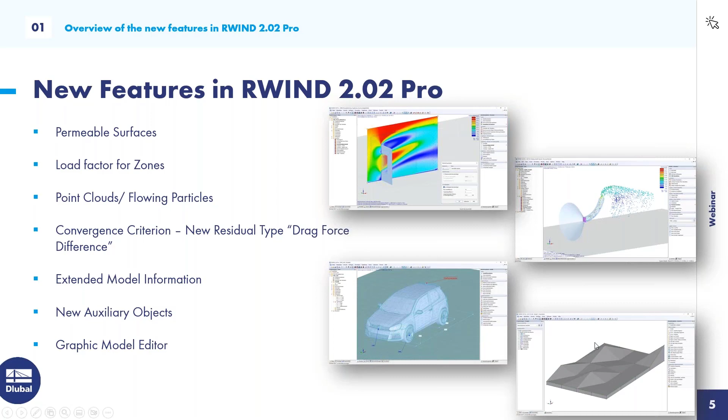Last but not least, the feature I want to show today is the graphic model editor, which will allow you to directly model in RWIND. You do not need CAD software, or you can also use RWIND besides using RFEM 6. This allows you to create models and also to create a terrain with thickness vectors. So whenever you are curious about modeling the terrain and the effect it will have on your model and the wind flow, you can do this directly in RWIND.

Let's go to the first slide, which gathers some more detailed information. As you can see, I have put some links on the top right of the slide. They can be clicked and you will be directly guided to the topics of the online manual.

These newly introduced surfaces are meant to be introduced for zones as a material. You are supposed to enter 3 parameters: the Darcy coefficient, an inertial coefficient, and the porous media length in the flow direction. You can see on the right how these formulas are put together, about the permeability in square meters and the Forchheimer parameter. Of course, you will have some preset data, so there are standard values introduced, but it's up to you to calculate these parameters and enter them for your zone.

It's mainly meant to be a boundary condition, a prescribed pressure drop on a defined surface, front or behind. The main advantage we see in these permeable surfaces is that no fine modeling of your permeable structure is necessary. You can imagine it allows simulation of scaffolding tarpaulins, dust protection curtains, or mesh constructions, which are usually a quite thin structure, leaving you with a 3D solid mesh that needs to be quite fine, at least in these areas.

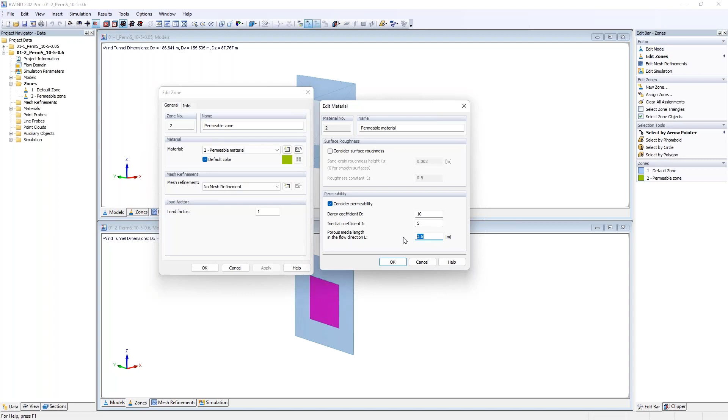I've in the lower file not changed the preset of D and I. I've just increased the media length into the flow direction to 0.6 meters. And on the top one, just to have a quick comparison, I have decreased it to 5 centimeters.

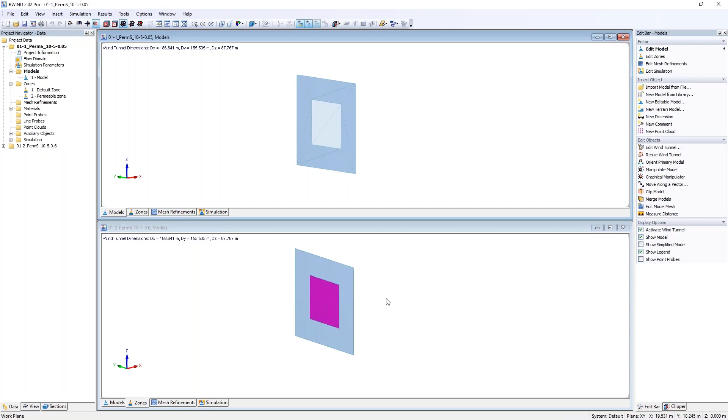So what we would now expect is that the thicker the permeable surface is in the flow direction, without changing the other parameters, the slower the velocity should be at the back of the surface, since it's thicker. So it should decrease the velocity, and I will just compare them.

You can see in the velocity plot that on the thinner permeable surface you have a higher velocity at the back side of the surface. So it's letting more wind through, not slowing it down much. If it's thicker, on the bottom file, you can see that the velocity reduces. This more or less simulates having some curtain or similar obstruction blocking the wind.

All right, let's jump back into the slides and go to the next feature I already mentioned: the load factor for zones. It's a post-processing factor by which you can increase or multiply the load of the zone. As already told, it can be increasing or decreasing, and you can also set it to 0.

I've prepared another example which already contains results, since the calculation usually takes some seconds or minutes depending on file size, but I've already calculated them. It's just a rectangular building or structure where you can see I have a default zone in blue, which I did not touch.

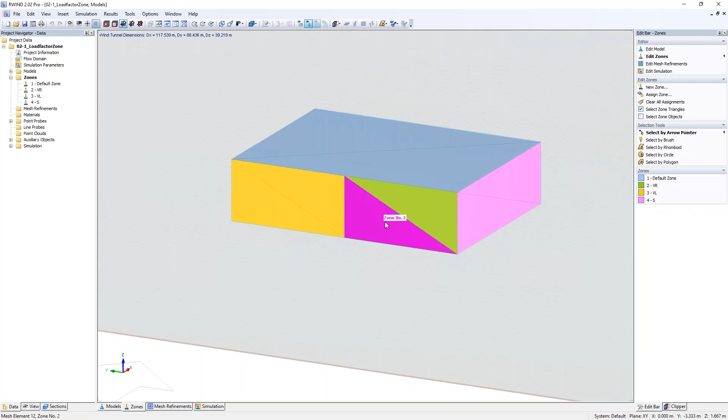I have defined some more zones. I have half of my front: on the right side is my right zone, which is green, and the left zone is yellow. And I have some purple zones on the side.

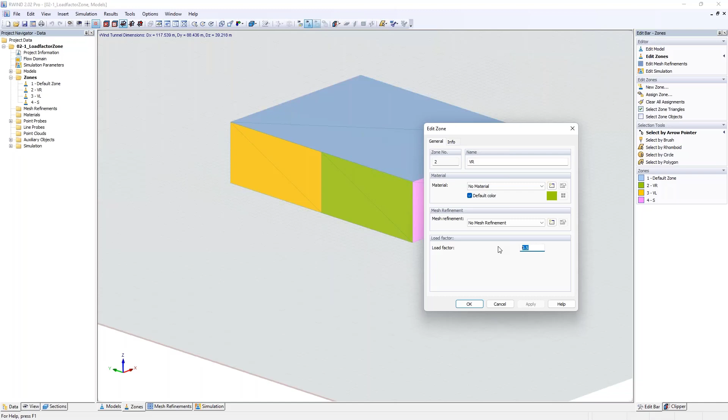Once you've defined these zones, like the permeable surfaces, you can double click into the edit zone bar, and you may have already seen the factor in there. I've chosen for my right green side, half of the front, a factor of 0.5. Compared to this, the factor on the left is 1, so you quickly see it adjusting the results. And just by chance, I set the sides to 2.

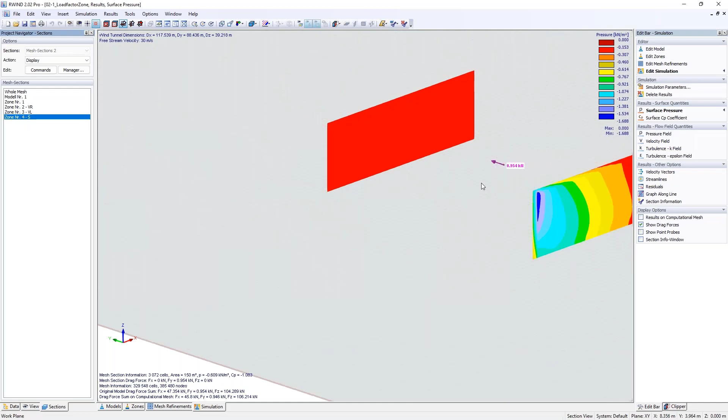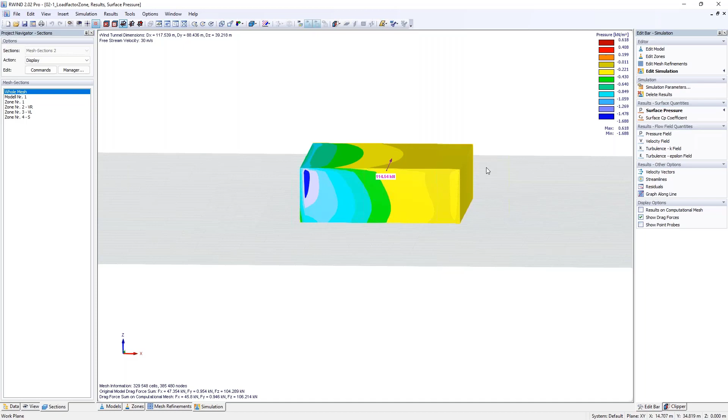You could, of course, also evaluate the sides, but this was just an example showing that you can adjust multiple zones. The main focus is that maybe the wind analysis has some weaknesses — if the steady or stationary calculation can't really capture the suction at the backside of a building, you could define a zone there and increase the value. Or if you think you need to add a special safety factor, you can increase it. Or if you think it's over the top, you might decrease it.

And then if you hand it over to RFEM 6, the loads will also include that factor, so you do not have to rearrange or multiply them later on in RFEM 6.

I will go to the next feature, which is also a quite interesting evaluation feature: point clouds. These are most likely just graphical objects which you can put in there, and this area contains a special amount of points which will be evaluated later on.

And you can gather the information of your streamlines. So maybe you're used to the streamlines to see how the velocity changes or how the wind is flowing. And you can then also see some flowing particles, only for the transient calculation. And those flowing particles can also be displayed at any time layer.

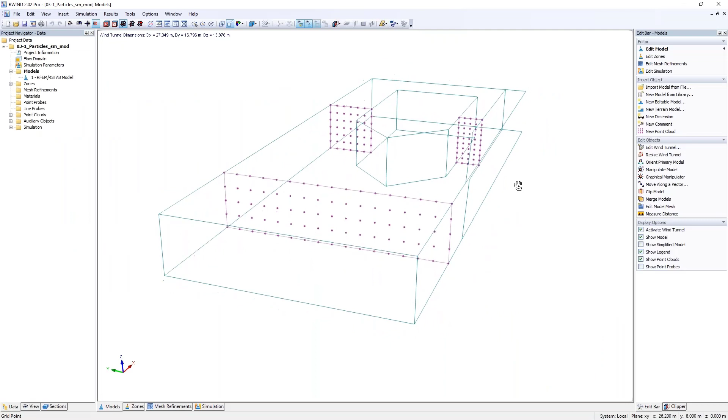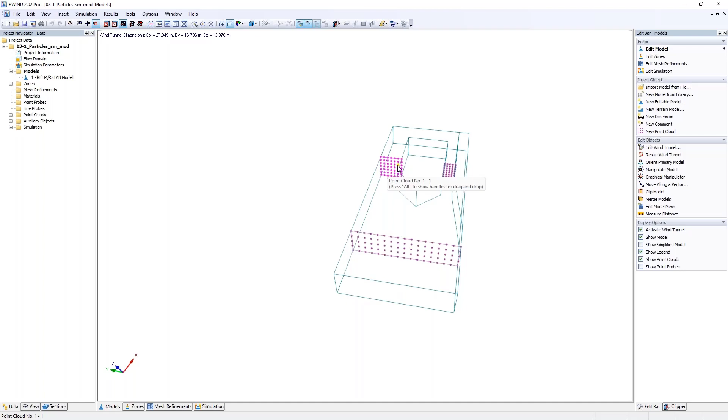I've also prepared an example. I hope my laptop will be capable of it. So it's a small wind tunnel where I have a 1 meter opening at the front. So the wind will go inside there, and I have a 45-degree triangle in the middle, and it will then be split into 2 flow directions, one on the left, which is 1 meter times 1 meter, and the one on the right is 1 meter times a half meter.

And of course, with such a guiding wall at the right, because I wanted to see how the particles will be flowing once I guide my wind into this tunnel. It is important that you go into the simulation parameters if you want to track the particles as well, and go into the particles tab. And there you have to input the number of point clouds. So you can write 1 to 3 because we have 3 point clouds defined in this example.

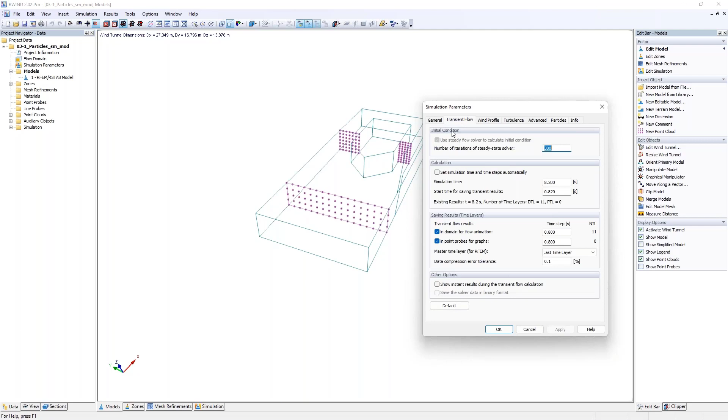And you can tick that you want to track the flowing particles. Once again, this particle flow is only available for the transient calculation. And once you have results, let's load the results for the streamlines shortly. Then you can see that the graphic will be shown quite soon. That was faster. Okay, so I have the flowing particles already activated.

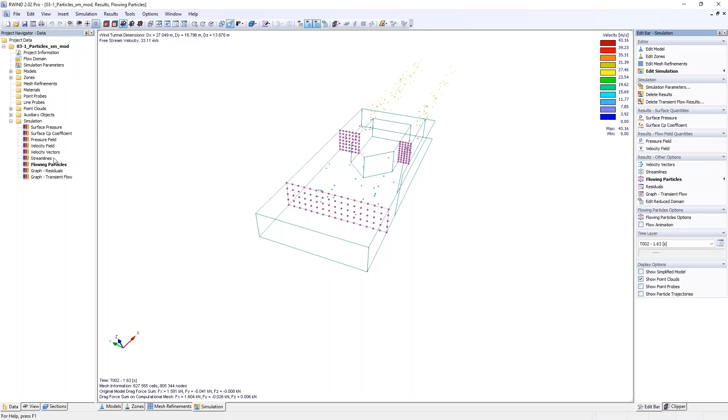I will go to the streamline results, and then you can evaluate how the wind is flowing. So you can see it from the start of the wind tunnel and even going to the end of the wind tunnel. And you can evaluate your point clouds one by one. So currently I'm only displaying the flow through the left point cloud, and you can see that it's not only the middle of the wind going there, it's more than the half. And this comes, I assume, since we have this smaller wind tunnel in here and it's blocking the wind a bit to the left. And then I guess the volume is also being pressured more to the left.

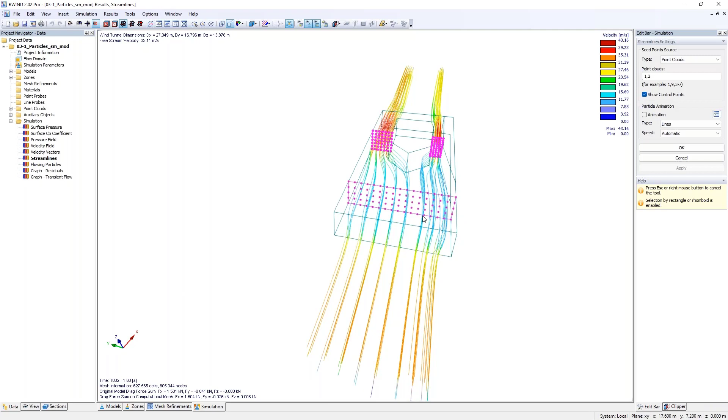We can also evaluate multiple point clouds in the streamlines. So we will add number 2 as well, which is the right one, the smaller one. And then you can check, of course, that nothing from the left is going to the right currently, and also less than the half is going to the right one. You can also have the front one displayed, which will of course only show you the same wind flow. But this is just for evaluation purposes, so you can check how the wind is going through.

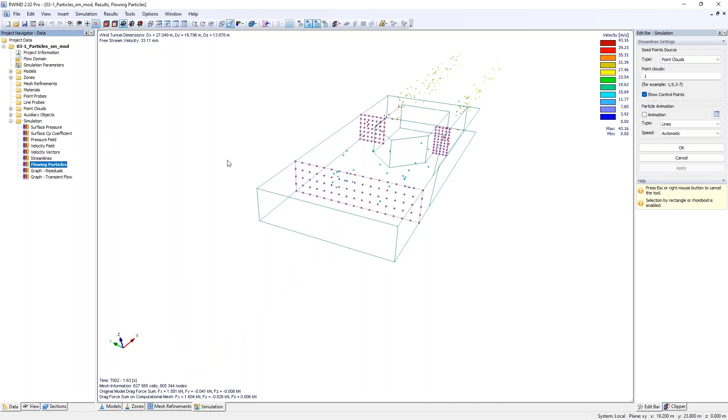So I will now switch to the flowing particles for the transient calculation. And they are then displayed as small bubbles. Let's hit cancel. You can, of course, also adjust the thickness. So I will increase the size just a bit so that they are better visible for you. That's 50 and set OK.

And you can then animate them. So you can choose your own time layer if you want to with this bar. The master time layer for this example is at 8 seconds 20. And you can also do a flow animation, which would then of course show you how these particles behave. So you can see that they are more or less being created in here and then choosing their way to the left or the right, of course.

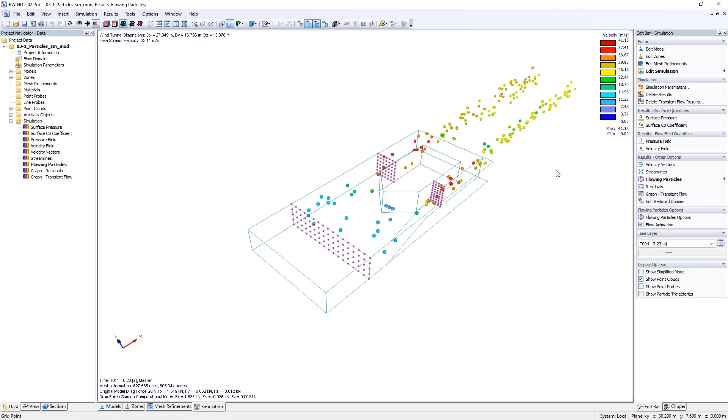And you can also see the velocity. So they are more or less being put on the surface, slow down a bit, but then are accelerated once again and flow through our animation. All right, so let's switch back to streamlines so that it will not slow down my computer.

Okay, so the next feature I want to show you is the convergence. You are maybe used to the residual graph, which is shown once you do the calculation. So it's, of course, trying to find some equilibrium. So the pressure which is put in the front of the wind tunnel should also come out at the end of the wind tunnel. And once it reaches some value, the standard value for pressure is 0.001. And for the new drag force, which is related to the porous model, that's up to 0.0001, so it's a bit lower.

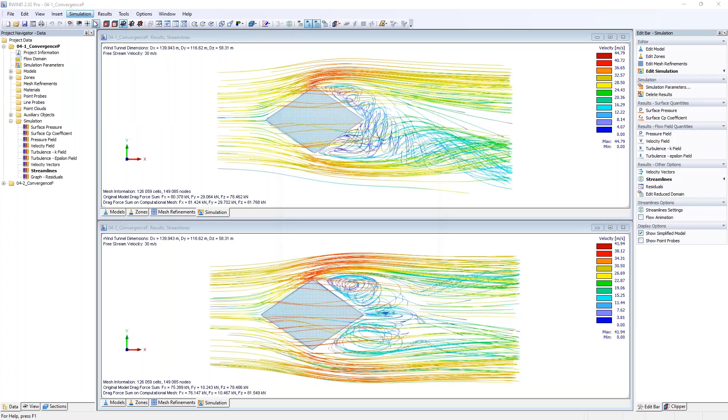On the top side, you can see it's the convergence in P, so the pressure. This is set in the simulation parameters for the steady flow in the residual type and also the target value. And if you evaluate the residual, you can see in the top one it did not reach the convergence. So it was set like this factor. And then you gain, of course, information, and you can see that the drag force is this and the pressure is this on your structure.

And on the bottom one, I have set that I want to have the drag force as our target value with the standard value which is introduced, and it should maximally calculate 500 iterations. And you can see in the diagram on the bottom one that, as shown in the main one, it converged earlier, having a look at the factor you set. And if you then check the pressure forces on it, you can see that the drag force is a bit lower.

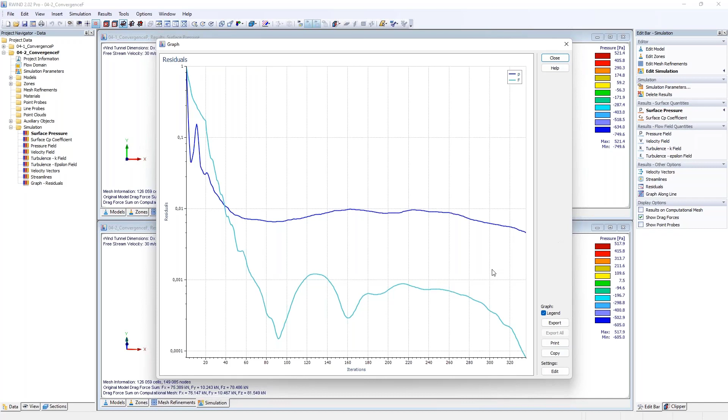But still, for this example, I would have some more iterations because, as you can see, the drag force is still falling, but it's not yet horizontal. So even if you add our standard criteria, it depends on the depth of the mesh and as well on the structure how many iterations you run. It's only a stop of the calculation, so it might be that you still need some more iterations.

So let's jump to the next information I want to show you. It's the extended model information. I'm showing the car, which is from the examples, and we will provide some more information for this model. So the model area in total, the projected area in YZ, so in the wind direction, and also in XY, so from top to down, for the primary model and also for the simplified model.

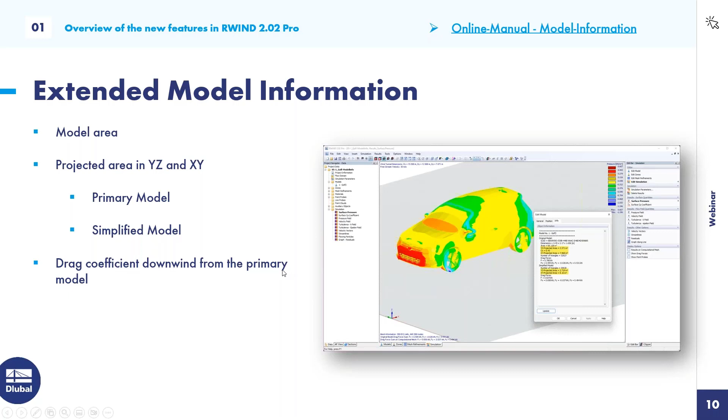So the simplified model, just to put it in a nutshell, is the triangle structure which is put as an overlapping structure over your model, which will then be put into the wind tunnel, because then you can get information about the pressure. And you can as well show the drag coefficient downwind from the primary model, so in the wind direction. So let's jump into the model.

As mentioned, it's just the Volkswagen from the examples. If you double click on the model, you just have to go into the info tab, and then you can see the area. The dimensions are also available, for everybody who's not aware of it yet. If you want to check if your model is properly scaled, you can check the dimensions in there. And it's giving you the area in the projected directions, and as well the drag coefficient for your model.

Okay, so let's go to the next feature. It's as well the Golf displayed. These are the new auxiliary objects. So if you are giving a model to colleagues or to customers, you do not need to add these things later on after taking a snapshot of the model and putting it in with some programs. Now you're able to use dimensions, which can be put on objects or on the mesh surface. You can add comments freely into the area or attach them to objects.

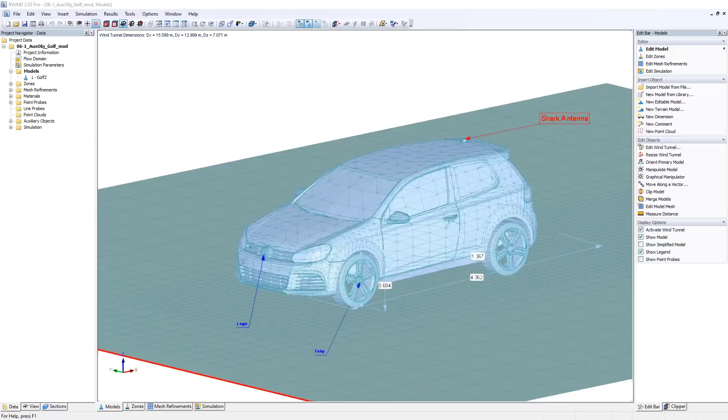And you can measure distance as a polyline, and you can measure distance between points on the model and or the mesh surface. So let's also jump into this example. This is the Volkswagen again, and it has a shark antenna. You can also switch the color. If you double click on it, you can also change the font. You can make it transparent, and you can add the frame and just hit OK.

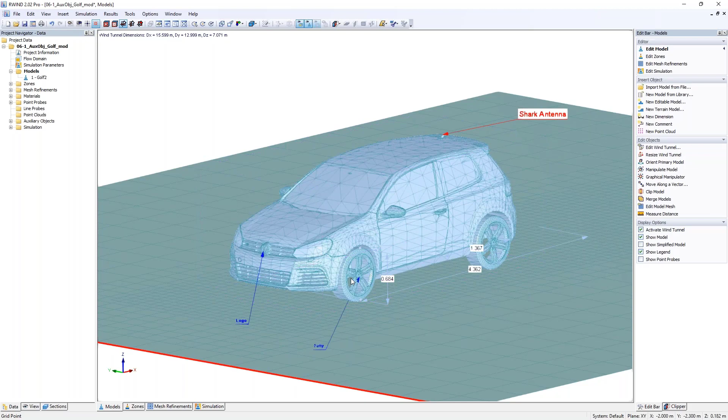And of course, this will then be adjusted. So whatever you like, you can introduce there. And you can also see that we there have our dimensions. So let's just hit the navigator so that you can see that these are introduced. So if it's mandatory for you to display some dimensions, you can display them as you can see in here.

And last but not least is the measure distance tool. So if you're interested in how wide a screen is, you can just hit it and try to hit some points of the triangles. And as you can see, it's a polyline, which will give you a total length in the dialog of the line and as well the separate line lengths. So it's quite useful to quickly measure on your object, so you don't have to jump into the information, but you can see that this triangle is roughly 30 centimeters.

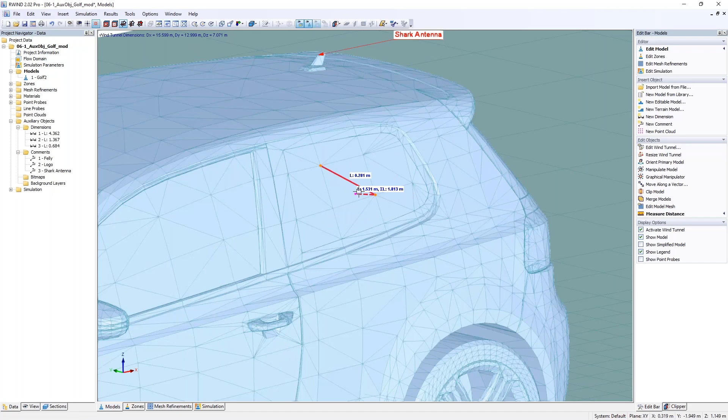Okay, so last but not least on my slide is the graphical model editor. So this is newly introduced into RWIND as well, and this allows you to get rid of expensive CAD software. Well, no, of course not. But it's a quite useful tool if you want to model easy objects. It's of course not as experienced as AutoCAD or Allplan or RFEM is, but you can quickly enter some objects like nodes, curves, surfaces, and solids, and even do some intersection.

You can also use modeling tools which are known to you, like copying, moving, rotating, and mirroring. And also a main feature is that you do not have to create your terrain in a CAD software. You can create it quickly in RWIND. And if it's, let's call it simple terrain, then you can define the topography based on graphic objects and thickness vectors. So let's jump into the example file.

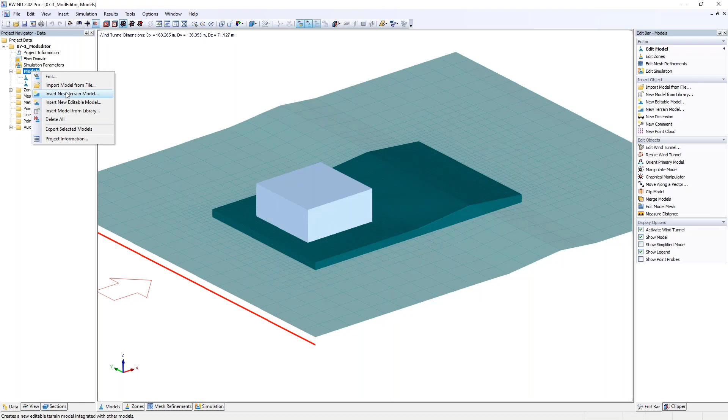I just want to quickly show it in here because after that we will switch to create our own solar panels. So you can see that if you right click now on the model, you can insert a new terrain or editable model. I already did this, so I will open this one in the model editor. And you can see that I have there a solid, and I have the chance to insert objects like points, circles, lines, surfaces, solids, and so on. And I have also the option to move it, rotate it, mirror it, and also to intersect something.

So if you already downloaded the version and you're curious why I have text beside my buttons, it's a smart tool to activate this in the View tab, where you can switch into Navigator and see the edit bar options. And there you have the possibility to show the icons as well with the text, which is quite smart because, well, I'm not a graphic guy. I also want to read what is written in there if you're new to the program or not used to the program. And then you can see the text, which is explaining the symbols. So you have, of course, also the option to change or edit your model. I will leave it as it is.

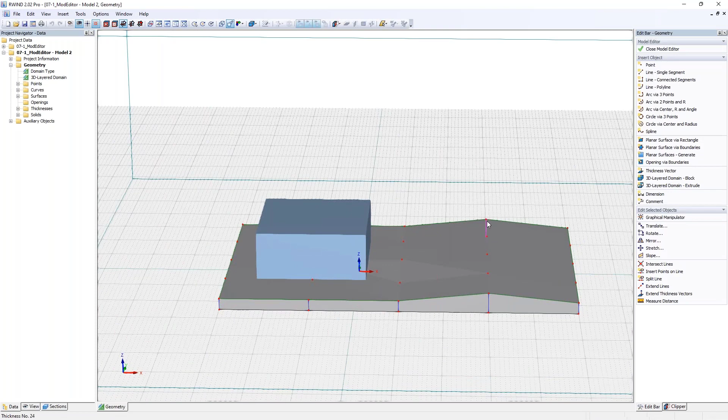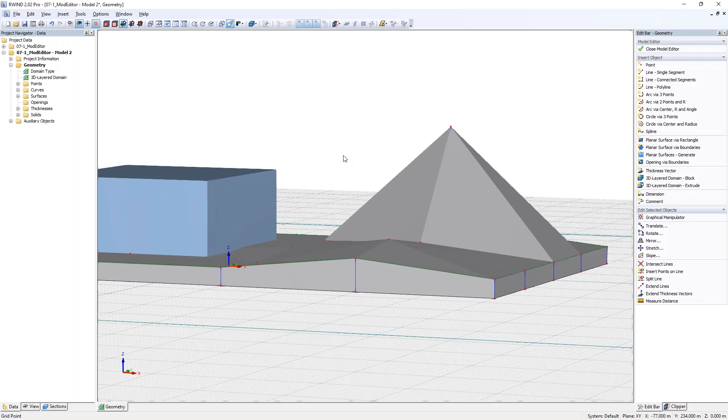And as already told, you are also able to insert the terrain. So we can also open this in the model editor, and then you can see your construction and that you have some thickness vectors in here. And that's quite easy then. You can, of course, also define the amount or later on copy some more thickness vectors into the terrain to simply modify the nodes. So if you double click it and you think that the thickness of the terrain is 6 meters in there, you just adjust it. Or if you are crazy and you put 20 meters in here just for visualization, you can see that you will have a small mountain.

And this model would then also be taken for the wind tunnel, and it can then be used as a lower boundary condition for your wind tunnel. And the wind flow will then, of course, interact with the terrain and then be put on your building. And it might be quite useful or necessary to also take the terrain into account.

All right, so this will sum up the overview of the new features. Time already passed as well. And now I want to jump into the program by creating a new file. So let's go back into this one. Let's close it, don't save it. And I just opened the program now, and we will go and hit a new project. Let me shortly open my file where I have my steps so that I do not forget anything.

And let's give it a name. I usually write my date in there. So it's already close to Christmas today, only some weeks missing. And well, I will call my file Solar. I hope it's not named already.

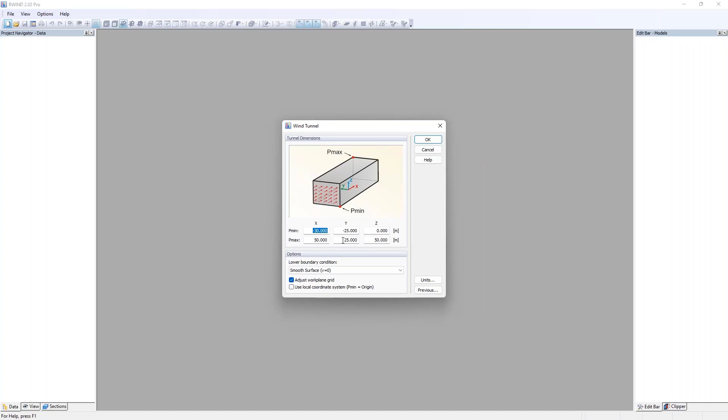And usually you would then hit import model from a file, or usually start in RFEM and transfer your model directly to RWIND. But I want to start with a blank sheet. So I would have to define my wind tunnel, but I will just leave it as it is because I will later on adjust it to the model. And then I have my clean, blank file.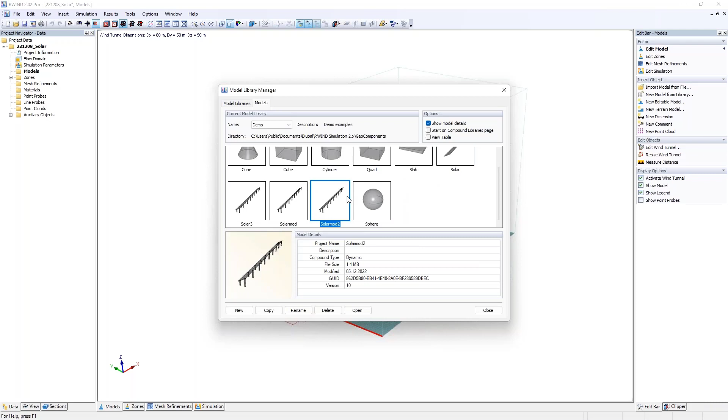And as already told, we also have a model library. If you also want to reuse your model, you just have to go into the File tab and open the model library. You can see I have already, of course, tested introducing my model myself, and there are some core models already available. In the model library, just hit the New button. You can now use a name. Let's call it Solar 08 for today's date, and hit OK.

Then you will get a domain type. The layout one is mainly for the terrain, and the general one is for your normal 3D solid mesh. And you could already define an initial workspace as well. We'll just leave it with the standard settings and zoom out a bit. I'm usually not used to the perspective view, so I'm just using the normal view.

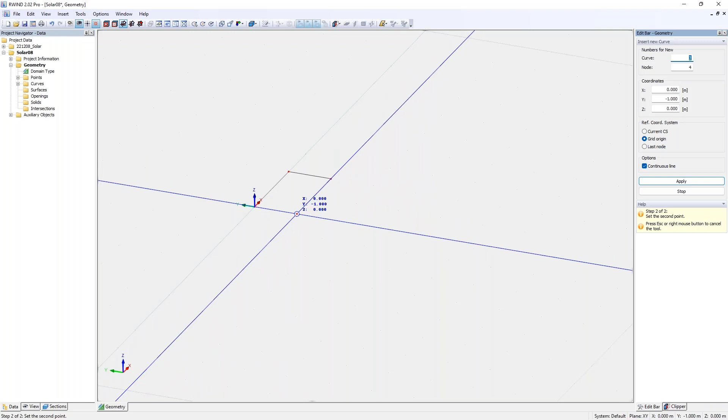The first thing I would do is adjust my grid and workspace, because as you can see, the presets are 0.5 meter, but I will increase it to 1 meter. It's just the distance of my dots. And then I can start to model in a blank file. I would start with a line, connected segments, and my dimensions are 1.80 meter times 1.20 meter. I could, of course, have arranged my grid to the measurements, but from RFEM I'm used to just creating my rectangle, and then I move my stuff to the correct dimensions.

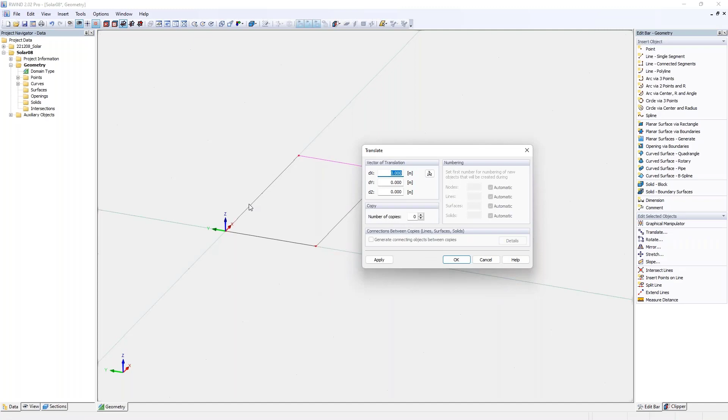As you can see, I have a 2 meter line. I can just mark the line and use the translate option. The X direction is usually meant as the wind direction, and I want it moved 20 centimeters down, so then I have 1.80 meter. The next line is also only 1 meter, and I want 1.20 meter in there, so I'm going to translate this by -0.2 in the global Y-axis. And then I have my first rectangle.

This should be some solar fields. I have one panel, and I will now mark everything and translate it, because the translate button also contains a copy option. I want it 1.20 meter. You can also use this cursor and get the distance in the graphics, which is also 1.20 meter. I will use 11 copies and say OK. And then I already have half of my solar panels created.

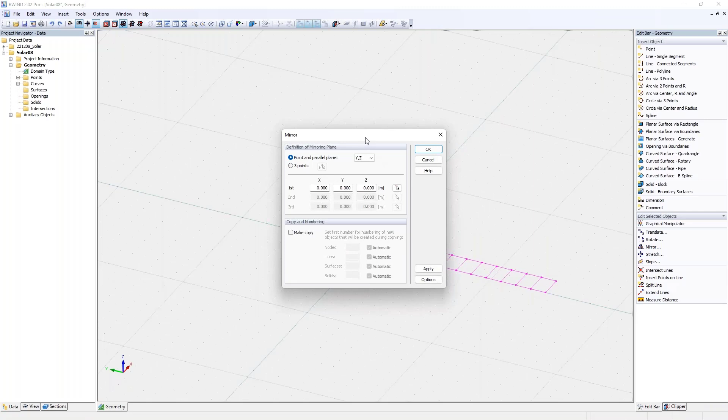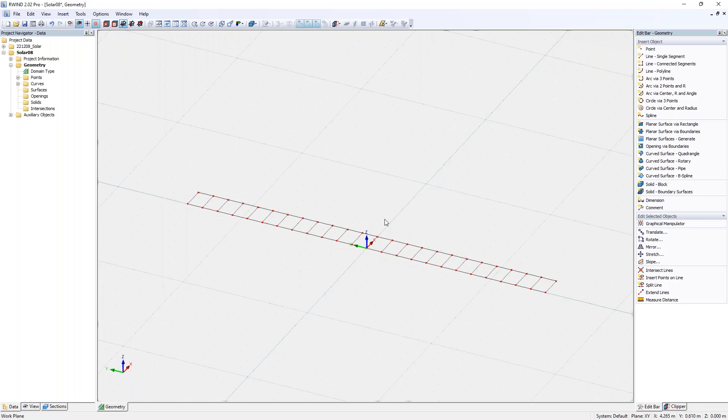I would then mark everything and use the Control key on the keyboard, using drag and drop to copy paste it to the other side. Of course, I can go back and use the mirror option instead. This depends on what you like, to be honest. It's up to you to use some or a lot of modeling tools. I would choose the XZ plane to mirror it at the 0 point, and do a copy. This will give you the same result. Well, I think drag and drop is easier for such an easy structure, so I'm used to doing drag and drop.

Once you have it, I will mark everything and create planar surfaces. It gives me a dialog with the information that I've now created 24 surfaces. I will move them because they are standing a bit in the air. Don't forget, if you only want to move, you have to remove the number of copies. 80 centimeters.

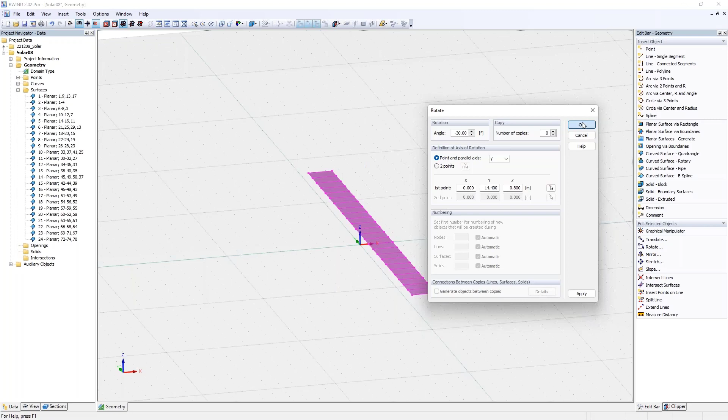It might, of course, also not be 30 degrees. Then you might save this model, put it back, and create another model with 20 degrees if you want to do some parametric studies for your file.

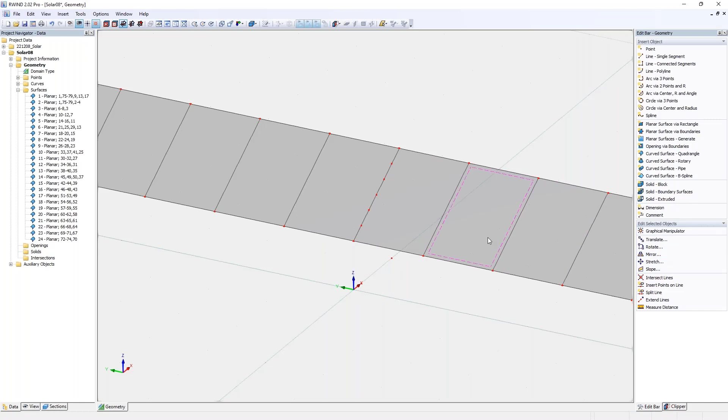You can of course use your measurements you have, and then I want to have some perpendicular columns, so they should just go down. So you can now, for example, pick those nodes and copy them down as one copy, and later on just adjust the Z value so that you have them laying directly on the ground. You can imagine there are smarter ways or even faster ways, but I'm usually used to do some quick geometric stuff. And then I want to have quite thick columns. Just for an example, to have 20 times 20 centimeter columns.

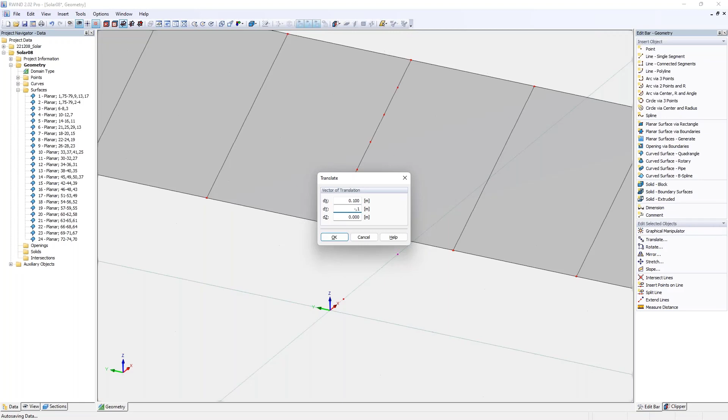I will use this, press Ctrl C and Ctrl V on my keyboard, which is quicker, most likely, than the translate stuff, but the translate offers some more options. But if you just want to quickly copy some nodes, like me, I want to copy it in this direction, then I can do this because I want to create a rectangle. So from my point of view, the quickest way to do so is to move your nodes to create the outer edge node of your rectangle, and then you can just enter it as a surface.

You can, new to RWIND 2, just mark it, hit Control, pick the node in the middle and move it to the left. And now we want, of course, to have the interaction to the top, which is then curved or angled. And I will use my surfaces and extrude them. So it's up to you to just extrude them a bit higher than the current surfaces are. So now they are solids. I don't need them for my example, so I'm going to delete them, as well as the top surfaces and this middle line. I don't need it for further modeling.

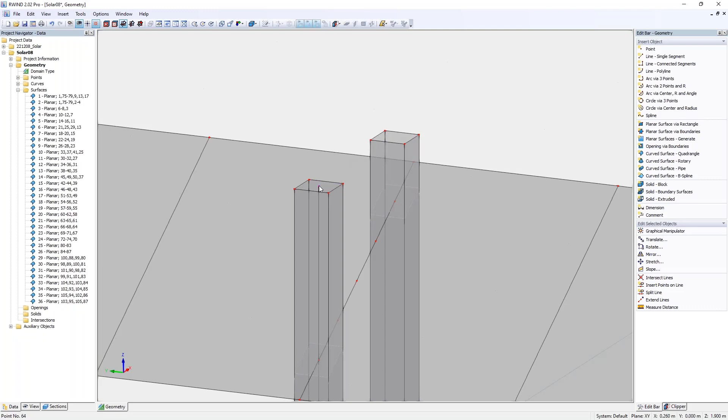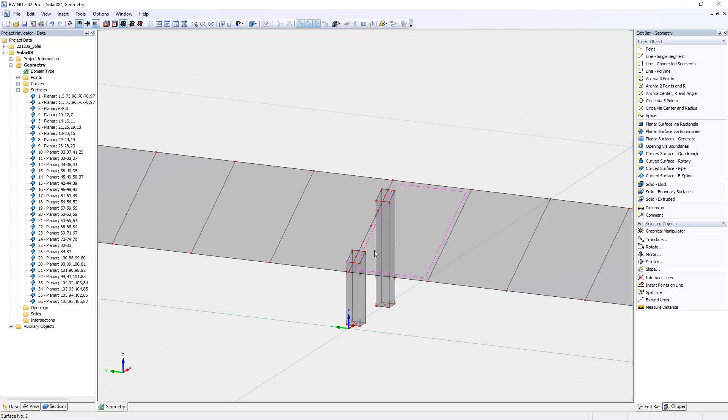And then I will use my intersections of the lines, which will give me the connection points where my column is going through my angled surfaces. And I would then just quickly move by drag and drop my nodes down, just so that the columns will of course end at the bottom of my example. So there are various possibilities to do so, but I expected that this is the fastest one for me.

All right, so now I have in the middle of my solar panel, like having a satellite, some columns. So I will mark them and then copy paste them by hitting the Control key on the keyboard on the places where I need them. And of course, I do not want to have my columns standing out of my solar panels. So I will use them here.

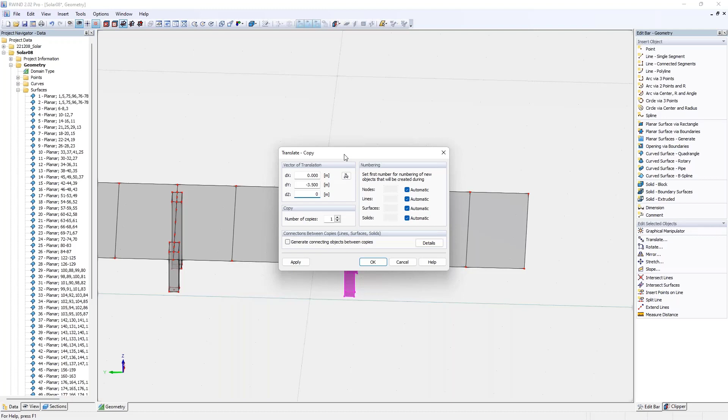I will mark them, and I will use the translate button, and I want to create one copy, and I use my move tool. So this outer edge node should maximally go to this node, and then I do not want, of course, to move it into X or Z direction, because I only need to move it into the Y direction. And if you do so, you can see that it's now there. So I have my columns for half of the structure.

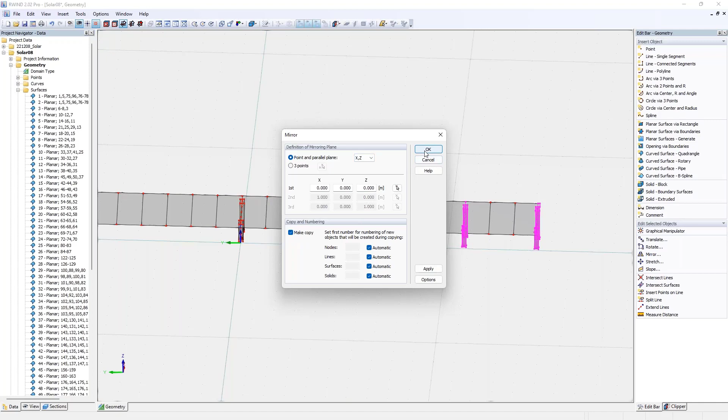Now I'm going to mark them once again and mirror them into the XZ plane, and my copy is still checked, and I hit OK. And then you can see that I have now modeled my columns beneath the solar panel. So what I am finally going to do is to give my panels some thickness. This can also be done with the tools. So I will extrude the surfaces perpendicular to their angle, and I will use a thickness of 10 centimeters and say OK.

All right, so that's it for this model. Then you just have to hit save, and you can close it. So we saved it into the model library.

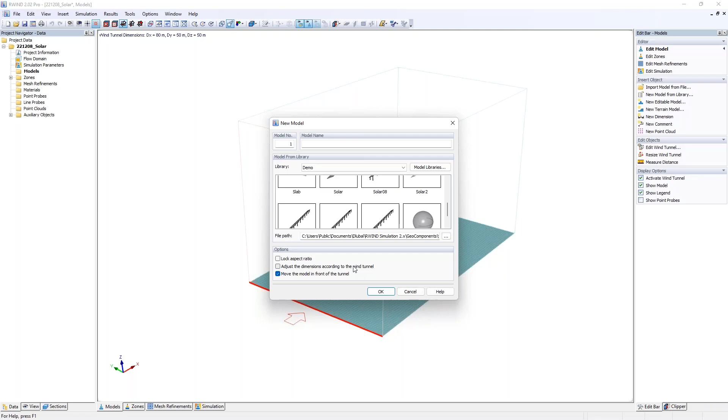So we are going to insert a model now from the library, and there is our Solar 08. Take care that you do not check that it will be adjusted to the dimensions of the wind tunnel. This option is mainly meant if you already have your model and you want to insert some other objects, so that it will be scaled. But we want to have our solar panels in the correct shape.

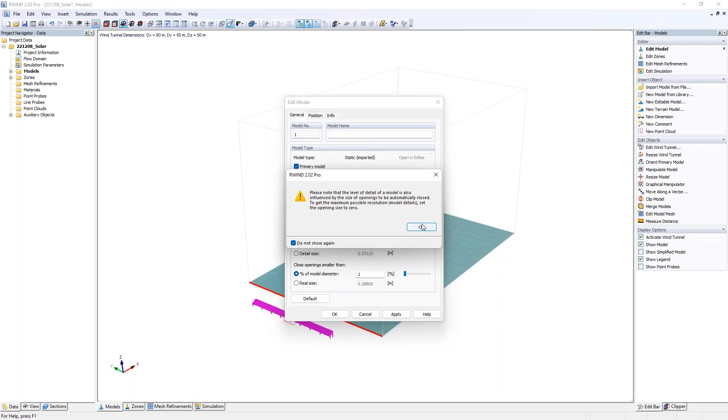So if you double click on them and hit the info button, it should have the area which you will expect. So it's now introduced, and I first double click on it and tell it that I want to have a level of detail of 4. You can see later on what this will do. And then I want to have it 9 times in a row.

Before I do that, I just want to arrange my wind tunnel, so the flow domain, to be adjusted to my model standing on the bottom, and hit OK. So it's then, of course, arranging or readjusting the wind tunnel to your dimensions.

So what we now did is, if I quickly only for this one panel show the simplified model, we have our simplified model around it. It's not that smart, you can see it's closing some gaps, but for a quick estimation of the wind forces on my panels, it's quite useful.

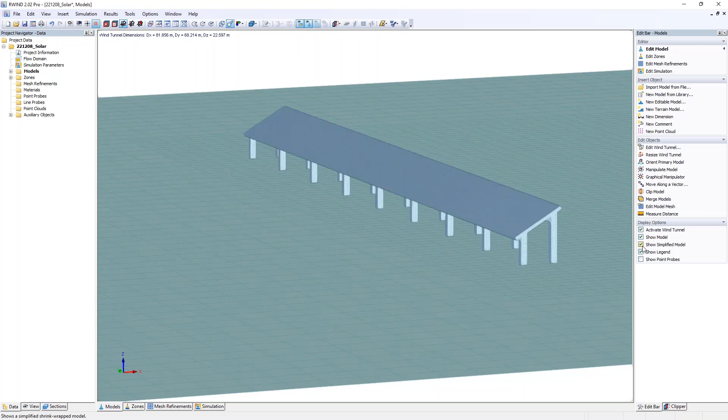I will uncheck it again, and then I will hit my solar panels, and I will use the move along vector, and move it 3.1 meters into X, and I want to have double check 9 copies, say OK. Then you have quickly your solar field with a gap between them that some people can walk through if they have to clean them.

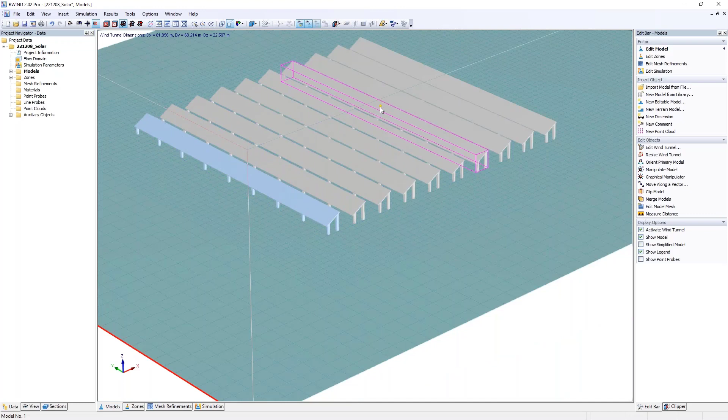And you can then once again hit the flow domain and adjust it standing to your models on the ground. It's usually adjusting the standard sizes.

You can then introduce your simulation parameters. I will keep the standard stuff. Usually you would go and define a wind profile according to your location, which in RWIND can only be put in manually. If you use it with RFEM, you can define the wind profile by your own, and it's listed according to our GeoZone tool.

So I did not do any big changes in the simulation parameters, and I have already calculated it once. So let me hit into the webinar and hit it without the terrain.

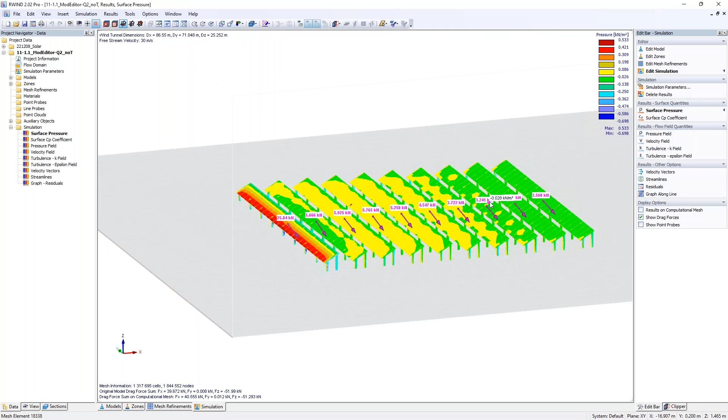You can then later on see that for your different solar panels, you will get your drag force, the pressures, depending on the color scale. And if you check the velocity field, hopefully it's not loading that long, you can see that the first one is working like, let's call it, a car spoiler. So it's rearranging the wind to flow over the panels.

So the first one will get a higher wind drag force, of course, and the others are standing like in the shadow of them, let's call it like this, so behind the first panel.

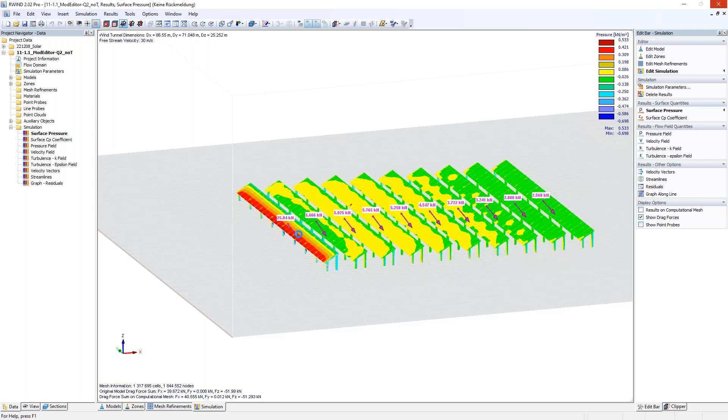Let's see if it's loading quite long, it's quite a bigger file, of course. Laptop is already making some noise. Oops, maybe I should have closed the other examples. Okay, so there it is.

So the scale is a bit misleading maybe. If you hit some other ways in here, well, I will not rearrange it. You could see that the wind is then being redirected from the first panel quite over all other panels. Okay, so let's close this with examples.

And now I want to introduce my terrain. So I just hit right click on the model and I introduce a new terrain. You can give it a name or not, depends on you. And then you have to type an initial shape in there. So what I want to do is to have it from -45 meters up to -5 meters.

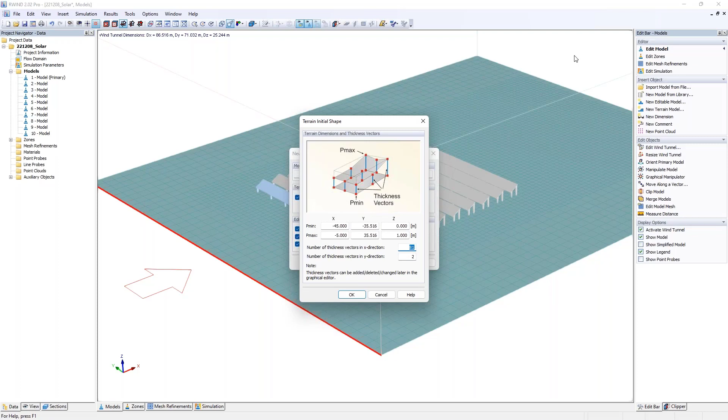I did, of course, priorly check where my model is standing. And I do some inputs for my thickness vectors. I only want to have some stair terrain, so I do not need a lot into the Y direction. And I hit OK. Then you can check from the side to see where the solar panels are standing.

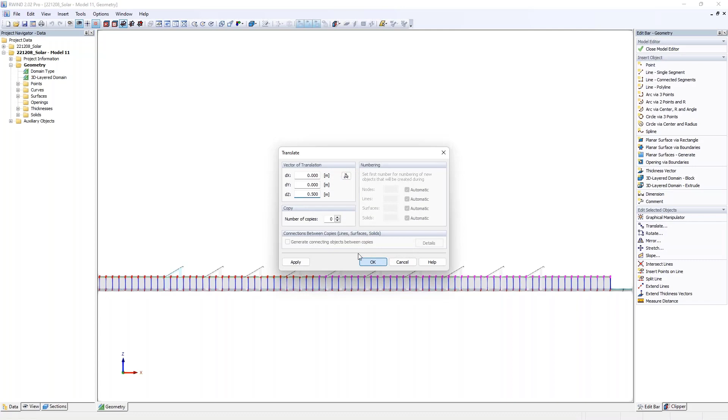In our example, I just want to raise half of this terrain with the thickness vector to be moved half a meter up. Yeah, half a meter up. So if you're entering it with a dot, then it's not giving you the warning. And the last three ones should also be moved half a meter on the top.

So you can see with this terrain editor, you can just quickly arrange a staircase terrain, or if you have some other crazy shape, you can of course also use those thickness vectors. And I will save it.

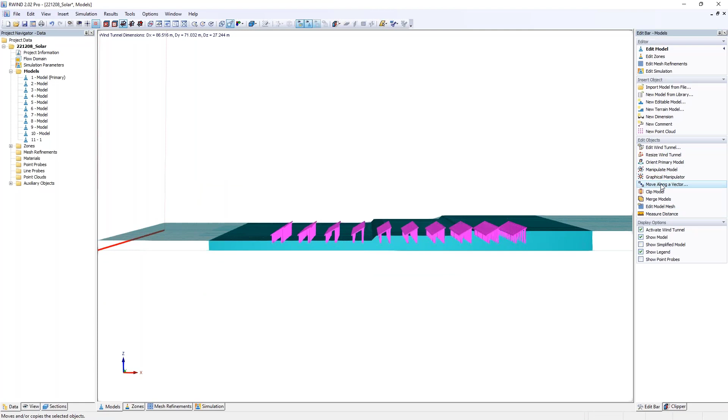And now it's laying somewhere, so I will once again adjust the flow domain and say OK. Then I need to move my main solar panels a bit higher because I have entered a minimum thickness of 1 meter for the terrain. So I would move them along a vector, not create a copy this time, and just firstly move them 1 meter higher. The last 6 will also be moved half a meter.

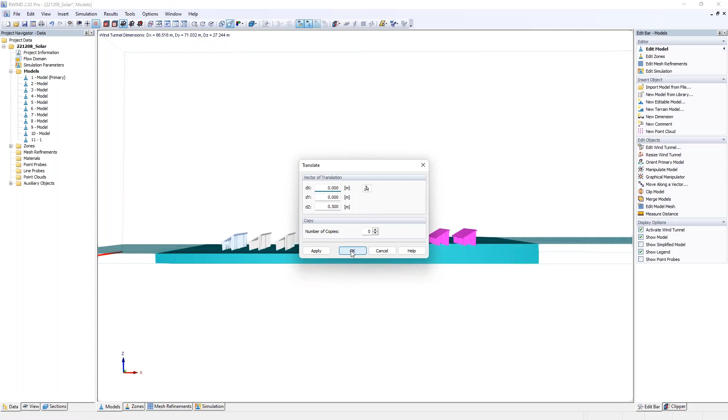But I did of course already calculate results with the terrain, so you have to trust me. You can see from the side that I have this staircase terrain, and then you can see that the drag force of the front panels, which are lifted a bit higher, is of course changed a bit. This gives you most likely an option to take into account the terrain. Sometimes this might be necessary and sometimes it's maybe not necessary, but this is up to you.

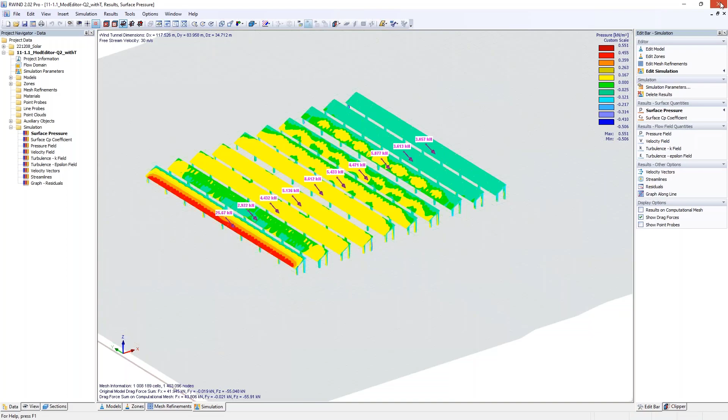This can be done mainly also in RWIND standalone. Okay, so let's leave RWIND standalone because the time is running, but we are quite good on time. I will just quickly close my RWIND stuff so that my computer will not crash down. Okay, and let's go into RFEM.

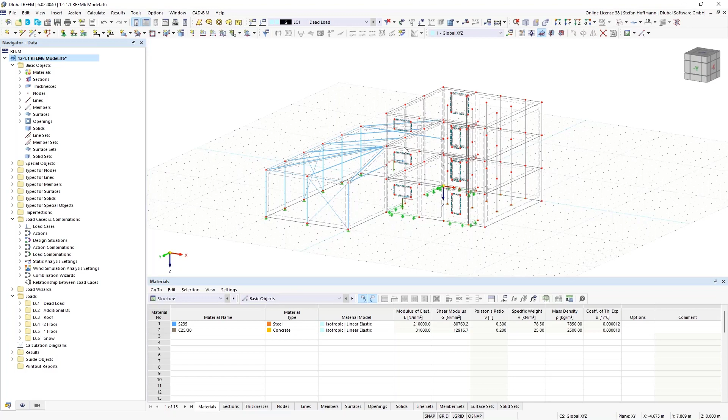So this is the model. This will later on also be uploaded on the website. This one is maybe known to you from the seismic analysis, so I did not create a new model, I just modified it. It's a reinforced concrete building with some steel attachment, let's call it like this.

And I have used load transfer surfaces because I will have some facade which is only giving the wind loads to the structure and not giving any stiffness into my structure. So for my purpose, I will use those purple surfaces. And I have, of course, defined if some members are not carrying loads, like those tension members here, or if my only couplings should get some force or not.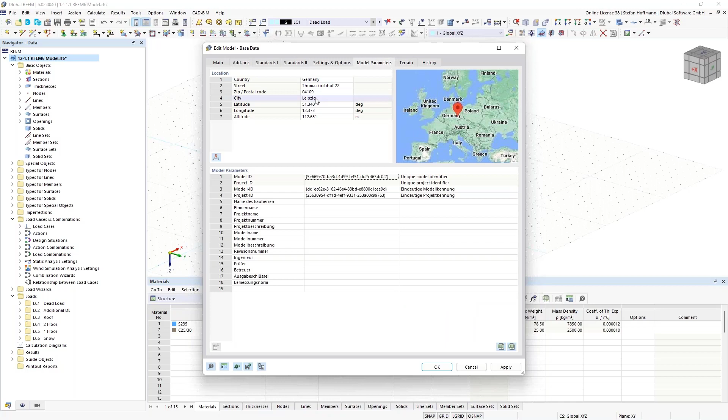So this is the stuff I have introduced, and mainly I will now show you what inputs can be done to RWIND and RFEM6 directly. The first one is of course to activate the wind simulation as an add-on in your add-ons. And then you go for a location, so I have chosen Leipzig to be the location, which is already loaded in our model.

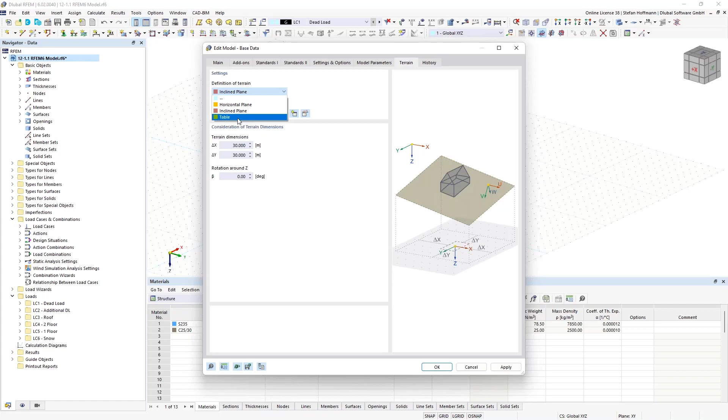And then you could already here define a terrain. If you're not doing anything in here, the 0Z plane will be a horizontal plane. You can enter some offset plane to check maybe some parts of your model only, or if it's standing somewhere higher or lower. You can also have an inclined plane defined directly in RFEM6, or you can enter some table values. I think this was already once shown in another webinar, which can then also be seen on our website as a recording. So for our example, I will not, for this purpose, use a terrain.

So I have now defined my location, and then I will have to go into a new load case. I will of course use now a wind load case and have the analysis type wind simulation. This will give me some more tabs on the top, and then it's intended to work from left to right.

So the first thing you can set is the wind simulation analysis setting, you can just hit to edit them. We will not divert into steady flow or transient flow, because I think this was already shown once in a webinar, but you can of course adjust values if it's necessary for you. Those are then transferred into RWIND. You can also adjust the turbulence model and some other parameters which are put to RWIND. So we will just leave it with the standard settings.

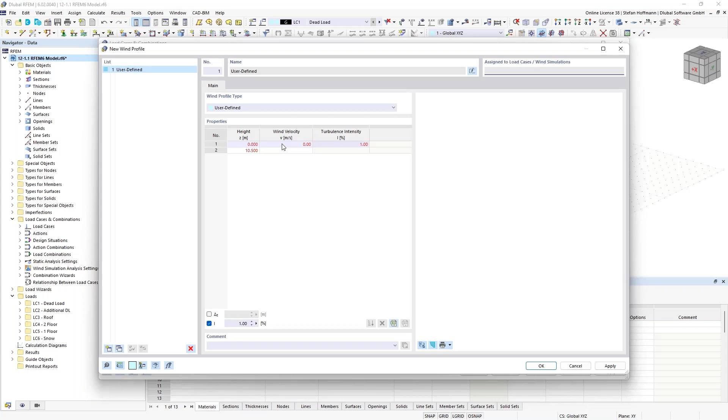You can also jump into RWIND, so if you want to double check how the structure is going to look, well of course we have to define some other stuff for it before, then you can click this button. And you can also create a new wind profile. So if it's user-defined, we could enter something like in RWIND, or we can now choose our standard according to the German location we have set.

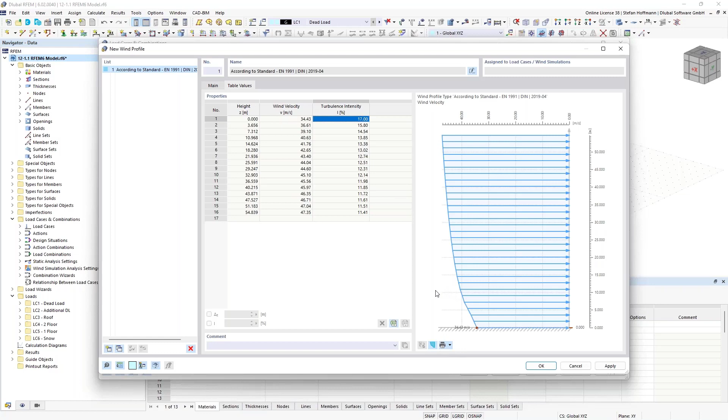You can also print these graphs into the printout report if you want, but we will create that later. So we will just define the wind profile, hit OK, and leave the 0 degree direction.

You could also, if you want, adjust the wind tunnel. If we put this into the wind tunnel, it will include everything that is visible. So we would most likely have our member shapes on the outside, but we only want our surface to be transferred.

So what we now need to do is go into the calculation and mesh settings. There is a new tab, if you have the add-on activated, called Wind Simulation, where you can choose to close openings, set a level of detail, add an IFC file as terrain or a surrounding model, consider the surface thickness, or run it in silent mode.

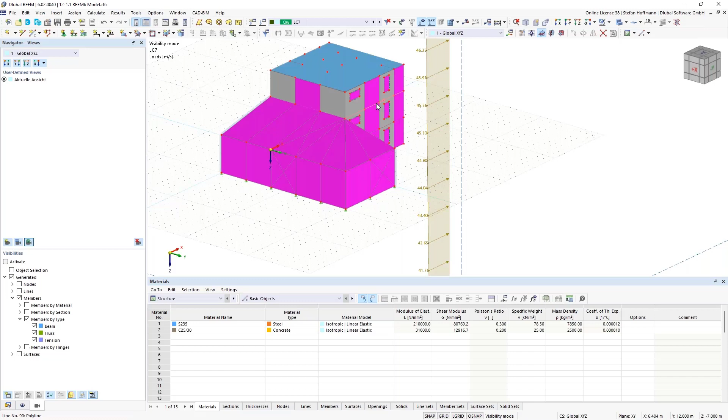We don't want to run it in silent mode, and we only want to export visible objects. So if we want only our surfaces, the quickest way from my point of view is to activate the visibility mode that displays all members, so you can see only members now, and then show the reverse visibility, so now I can only see my surfaces.

This outer shape will be given to RWIND. We have now defined one wind direction.

The next way might be that you just copy your wind direction and enter some degree of rotation of your model here, and you can see that the load will rotate accordingly.

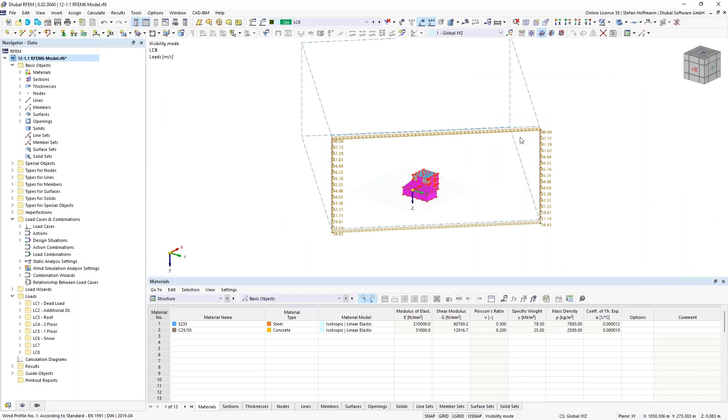The quickest way to do it is the wizard. You can just create a new load wizard for your wind simulation, and this will do it automatically for you, so you don't need to copy and enter a new number repeatedly. You will just add your wind simulation analysis settings, enter your wind profile, and then it will create all the load cases.

10 degrees is maybe a bit much, let's do 45 degrees instead, and this will create all the load cases for you. If you hit OK, this will save you a lot of time. We will not calculate them in this file.

I'll just quickly create a new printout report. There was already a webinar about it, so it is now also able to be modified once RFEM is opened.

Let's open it. There you can, of course, evaluate your data.

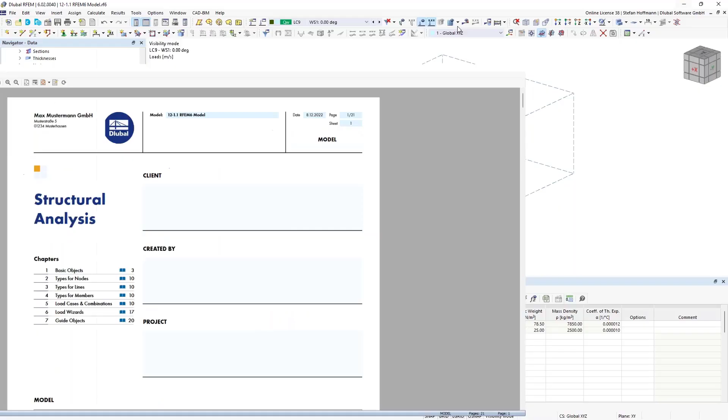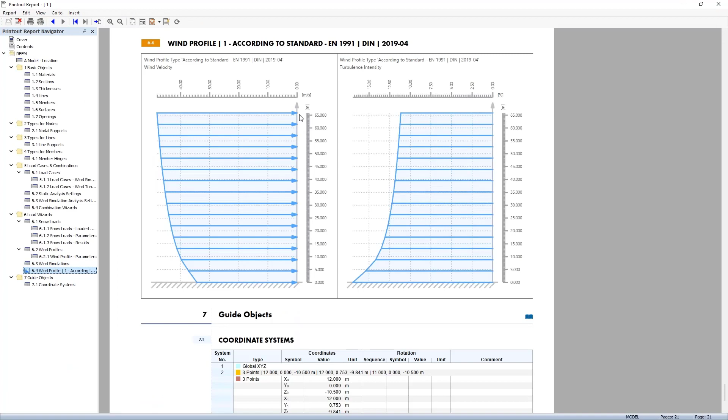I will not show how you can multi-print something in there, but I just want to show that you can print your wind profile in there. So if you're displaying it, you can just print it into the printout report, get a preview of it, hit Save and Show, and you can see that the pictures are smartly printed into the printout report.

We will not run the analysis now in the program. I already have results for my file, since this will also take some time to calculate. Once you've finished the calculation, you can also evaluate the results in RFEM, as they are then transferred back into the program.

So we will now have our normal wind load, which is put on the building, so you can see the deformation. The best thing to check is also the distribution of loads, which is available, let's call it only for surfaces, and not the transfer surfaces.

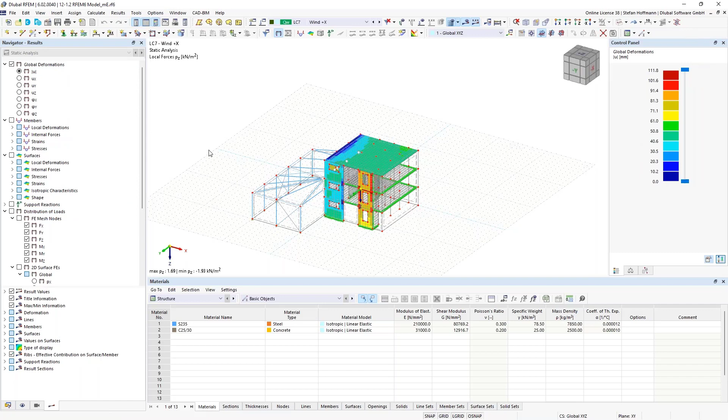But if you want to evaluate the results of your members, you can go back, cancel the visibility mode, and check the member forces, maybe the global deformations. I have quite a big load going sideways on my own member, so I may now think about adjusting my static system, or the load transfer, how it is put on my surface, because I think I've not excluded the top bar, but the facade might be fixed to the outer edges, and then the load will be gone.

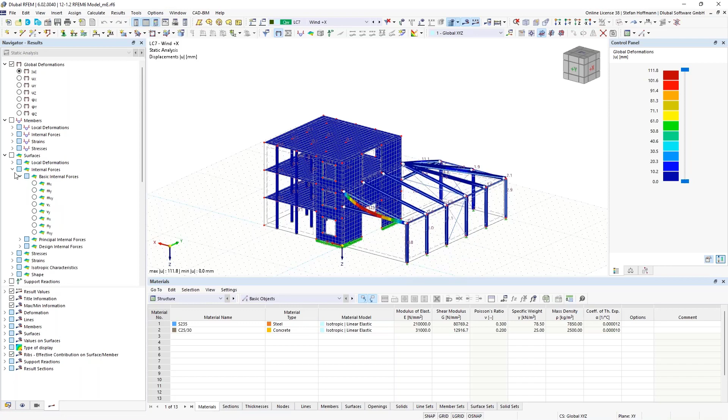You can of course also see the internal forces, like the shear force, the force in that direction, which is put from the facade, from our load transfer surfaces, as I have defined it here, only to the columns. This will then, of course, be available in your static analysis.

All right, so this is most likely what I wanted to show you, how to use RFEM 6 with RWIND. More information can also be gathered on the website.

What I now remember is that I missed showing you that you can, of course, also print stuff from RWIND into the clipboard and use it for documentation. But the printout report in RFEM is most likely better, because this is meant to calculate the wind loads, get an estimate, and use it with RFEM 6, or maybe do your own graphic snapshots in here and document it.

All right, so I will jump back to my presentation, because I'm coming to an end with my content, and I want to show you the prospect, what is planned in our development. This will not be ready in days, but this is just the way ahead.